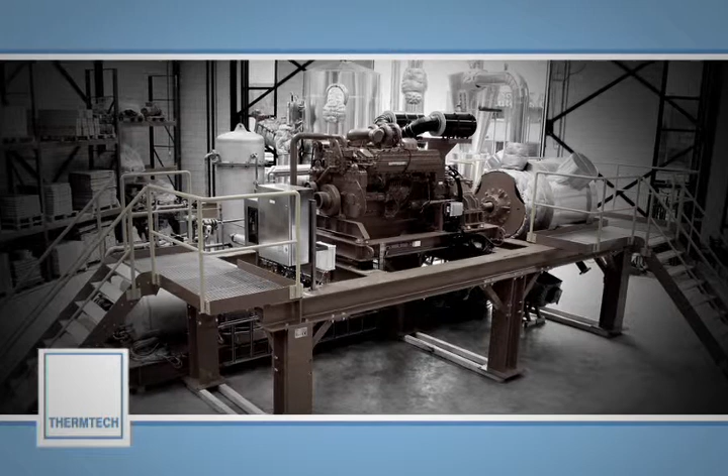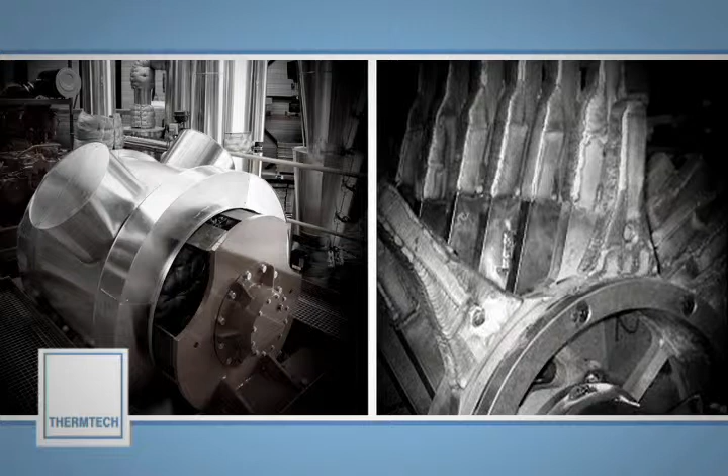The Norwegian company Thermtech is the owner and supplier of the thermomechanical cuttings cleaner technology, or in short, TCC, a patented and advanced thermal desorption technology able to treat various kinds of oily sludge. The company's head office is found in Paradis, located halfway between Bergen City and Bergen International Airport, with easy access from most large cities in Europe.

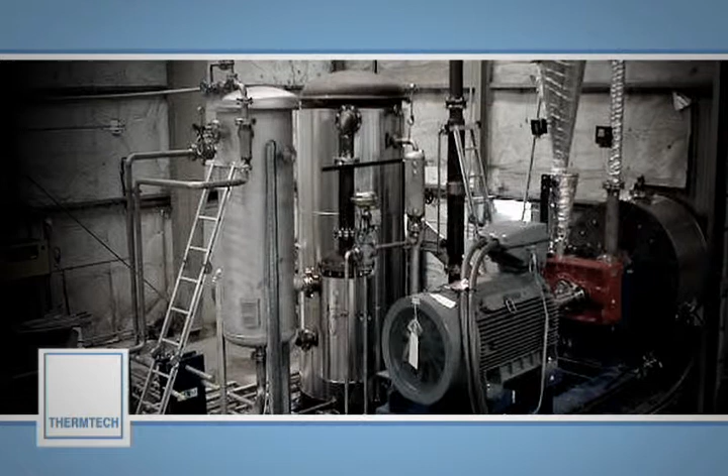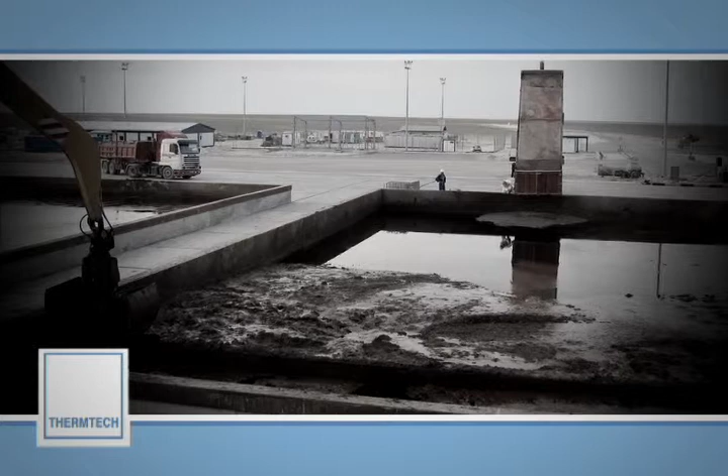The TCC is a very gentle method for separation of oily drilling waste into useful products, securing the reuse of the highly valuable base oil used in oil-based drilling mud, normally referred to as OBM. For that reason, a TCC operation is also commercially beneficial compared to other technologies or methodologies.

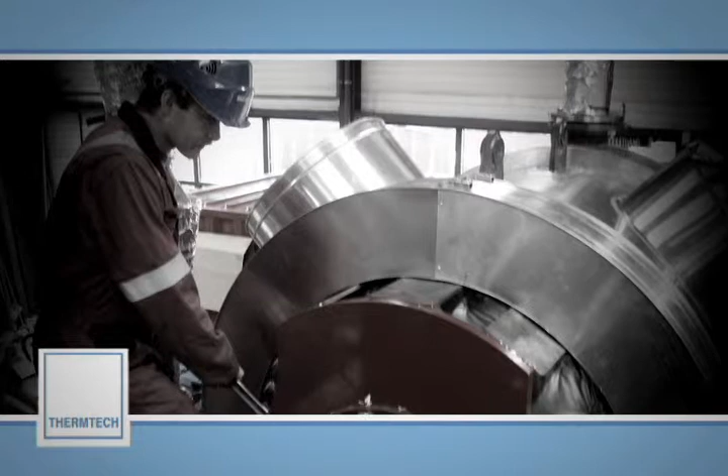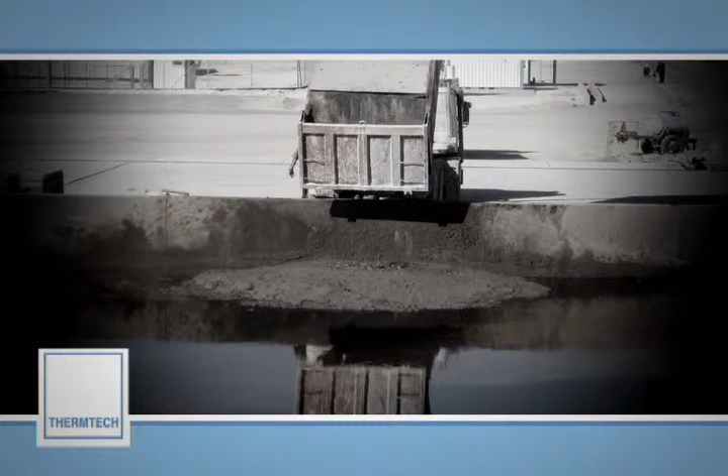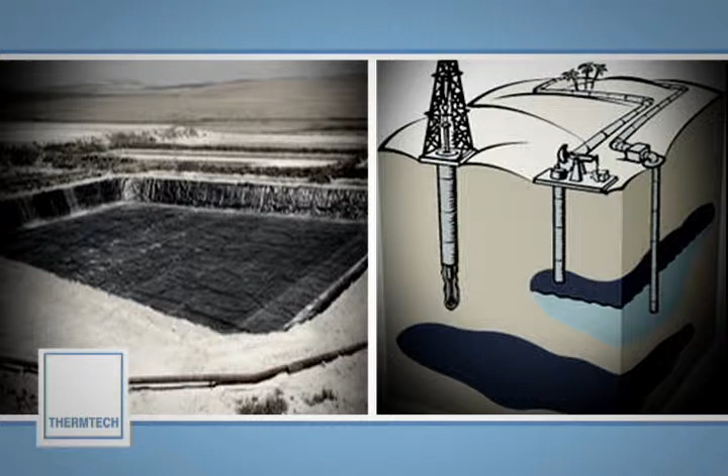In most jurisdictions, there are restrictions on how to deal with waste from drilling operations. Typically, there are limitations on discharging the waste to sea. The tendency is that these restrictions are further tightened as the environmental concern increases. There are various treatment options for this waste, like injecting it into a subsea well, controlled landfill, incineration, and bioremediation.

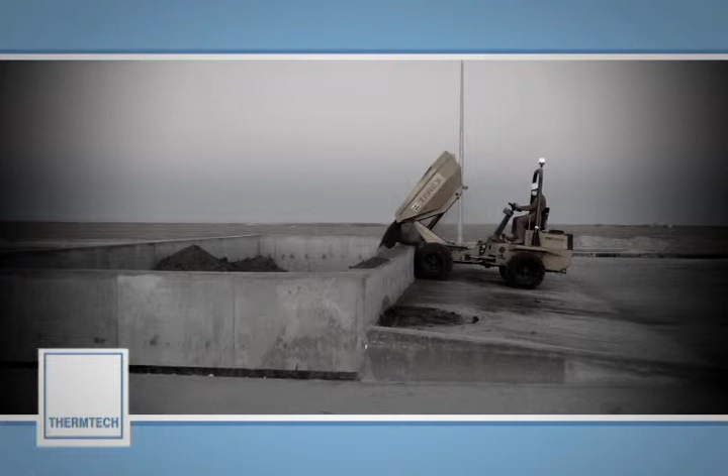With the increased focus both on pollution and on efficient use of natural resources, the global trends move towards separation of the components in the waste for useful purposes. The TCC fits well into this picture. The recovered oil can be used as a component in new OBM, and the recovered solids can be used for various construction purposes.

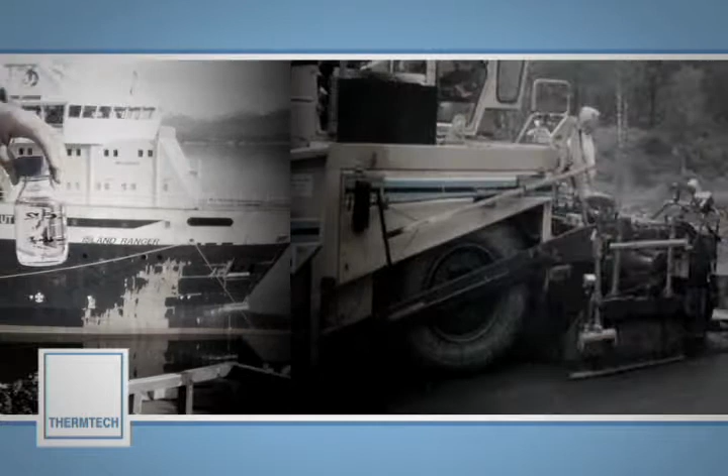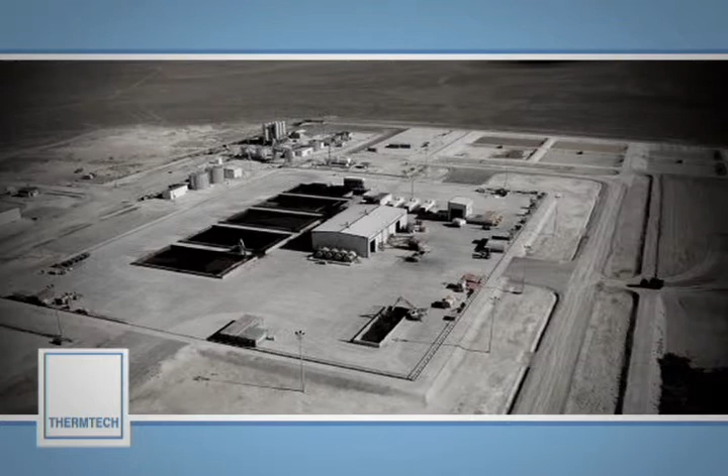TCC units are in operation in Norway, the UK, the Netherlands, Nigeria, Egypt, and Kazakhstan. New units will be installed in Russia, Turkmenistan, and Germany.

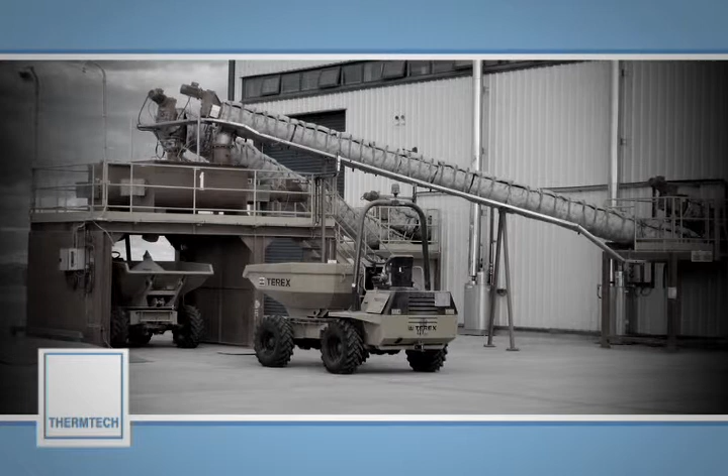By the end of 2008, at least 23 TCC units will be available for handling approximately 600,000 tons of drill cuttings in Europe, Asia, and Africa each year, contributing substantially to a cleaner environment and a more sustainable society.

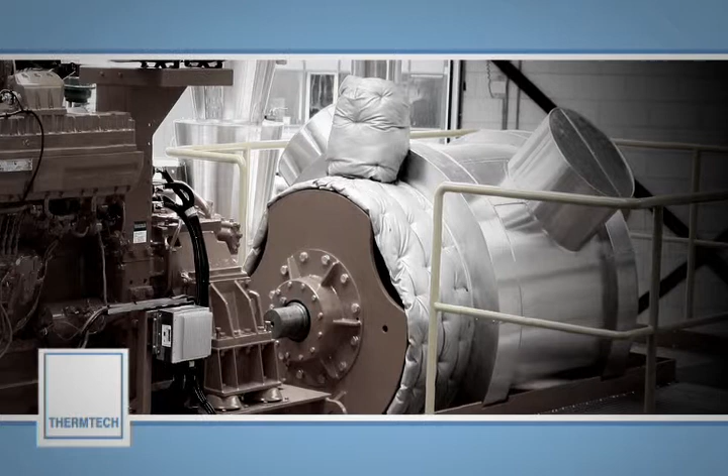In a lot of situations, TCC treatment can also prove to be the cheapest due to the high quality and value of the recovered oil.

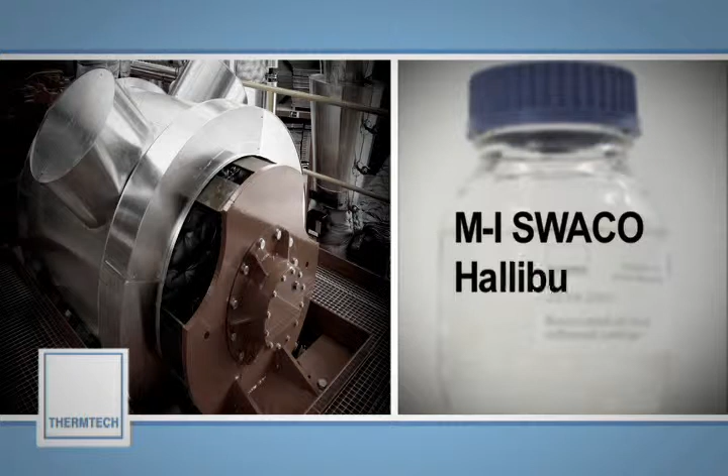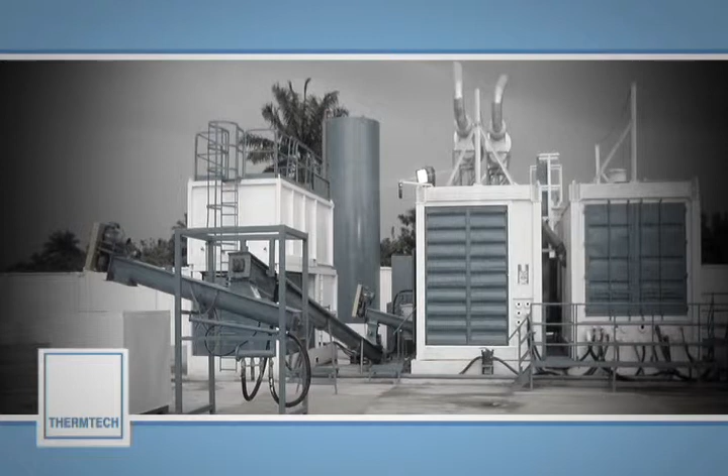Among Thermtech's customers, you will find companies like M-I SWACO, Halliburton, SCOMI Oil Tools, and Total Waste Management Alliance, referred to as TWMA. TWMA is currently Thermtech's largest customer, with operations in Scotland, Norway, Egypt, and Nigeria.

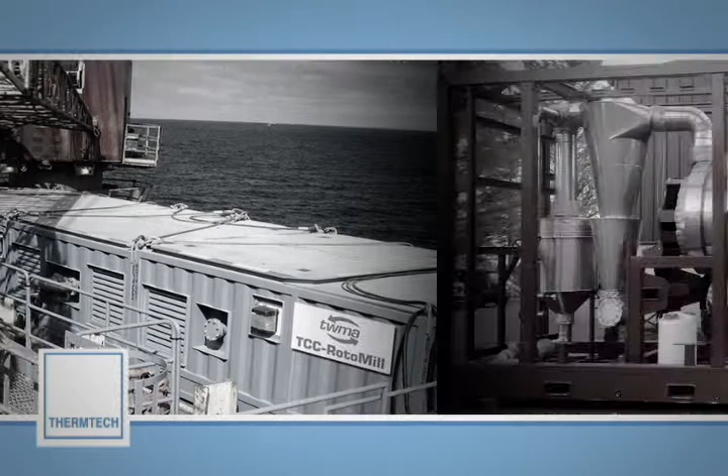TWMA is offering TCC treatment offshore under the brand name TCC Rotomill. Offshore TCC treatment will soon be offered by other Thermtech customers.

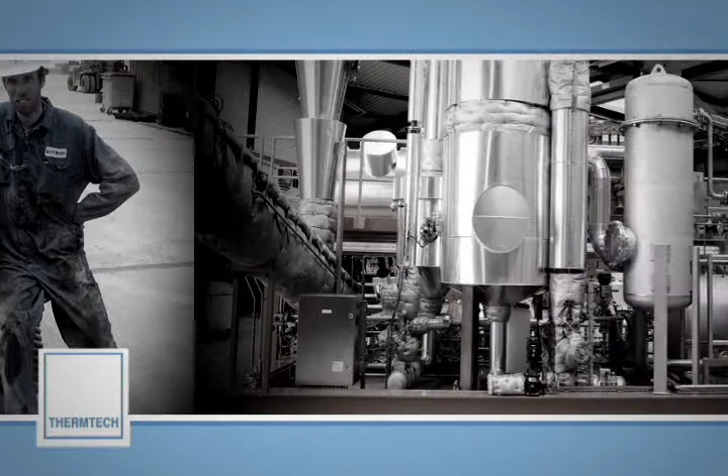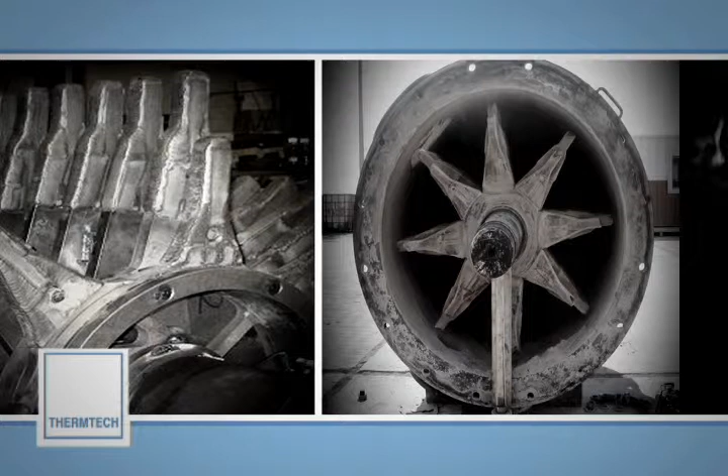Thermtech's vision to set the global standard for treatment of oily drilling waste is about to come true, thanks to the uniqueness of the TCC technology. The TCC is heating the waste differently than other thermal technologies, and this fact leads to a smaller footprint, easier mobility, a safer operation, and a higher quality of the output streams, most importantly the oil.

Let us now show you how it all works. The purpose of a TCC unit is to convert hazardous oily waste into useful products.

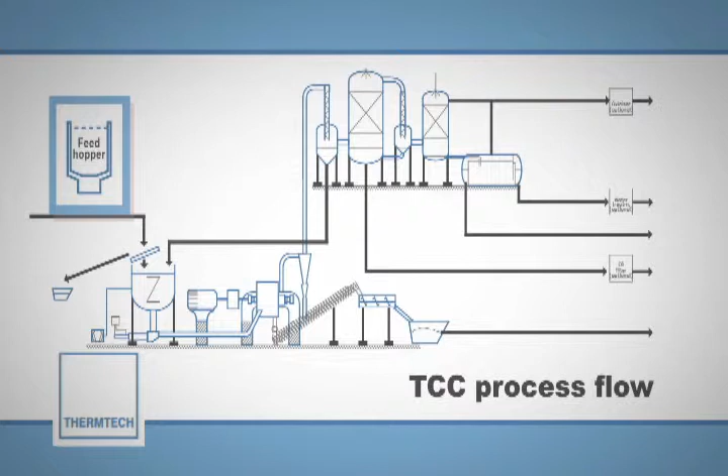The process consists of some main process steps: a feeding system, a heating process, often referred to as the mill or hammer mill, equipment for further cleansing of oil vapors from the mill, and condensing systems for oil and water.

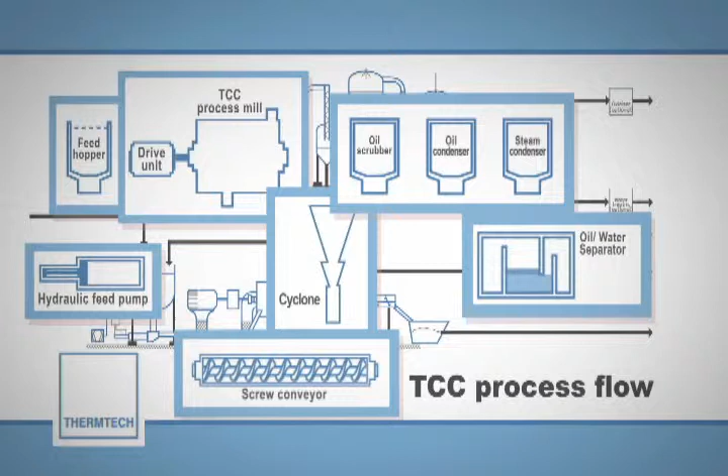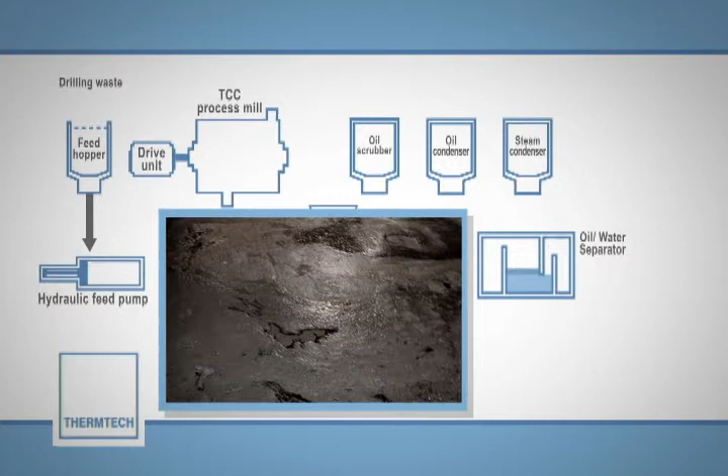All functions in the process are controlled by an advanced PLS system, and the manpower needs are low compared to other methods. A typical drilling waste will contain 70% mineral solids, 15% water, and 15% oil, percentage by weight.

This rather sticky mass is loaded into a feed hopper. Below the hopper, a double piston pump transports the waste into the next process step efficiently.

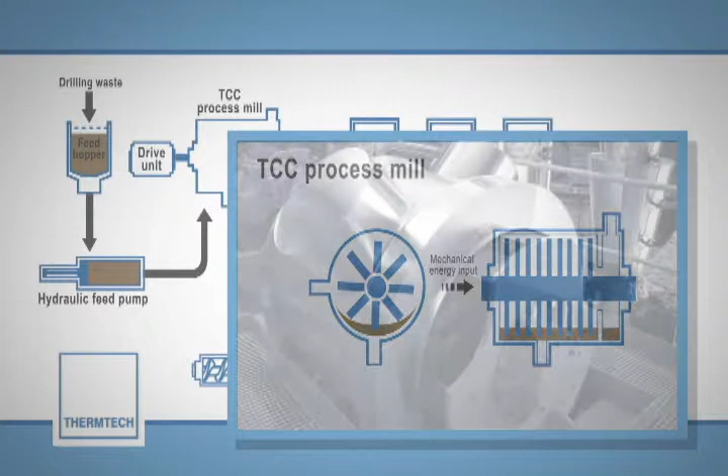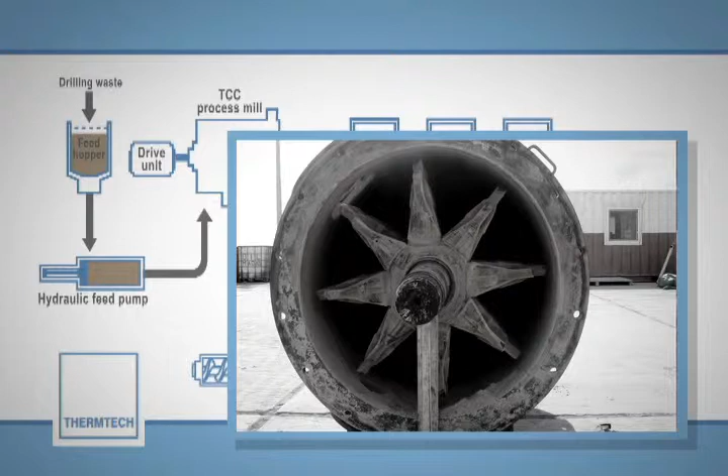The key component in a TCC is the process mill. In the TCC, kinetic energy is transformed to heat through friction created in the waste itself. This is the main difference between a TCC and other thermal technologies based on indirect heating. The core benefits of the TCC are all related to this difference.

A drive unit, typically with an effect of 700 kilowatt diesel or electric, sets a series of shaft-mounted hammer arms in motion inside a barrel-shaped vessel. Before processing starts, there are only dried solids in the vessel.

The motor will make the shaft with the hammers rotate. The solid particles will then be forced towards the inner wall of the stator, where the kinetic energy from the rotating arms will be transformed to heat by friction.

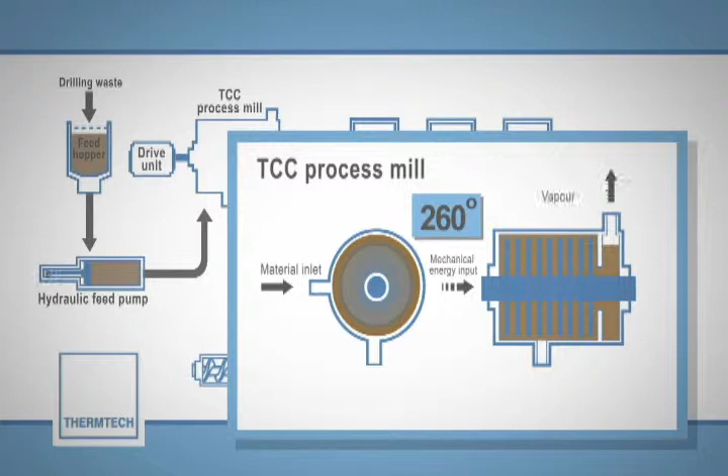When the unit has reached a preset temperature, waste is automatically fed into the reaction chamber. The waste is heated by the already heated dried solids. The solids in the waste will add up to the already present solids, and the oil and water will be heated and evaporated instantly. The solids are discharged from the chamber through an automatically controlled discharge valve designed by ThermTech,

securing both an efficient discharge without leakage of oil going out or oxygen coming in. The hot solids are then normally transported through a transport screw, cooling the solids to an acceptable temperature. The solids are then re-wetted to avoid dust from the storage tank.

Alternatively, the solids can be stored dry. The choice between the options depends on what is later to happen with the solids. A small amount of solids will be carried by the vapors out of the process mill. For that reason, the vapor stream will pass through a cyclone where most of the solids are taken out.

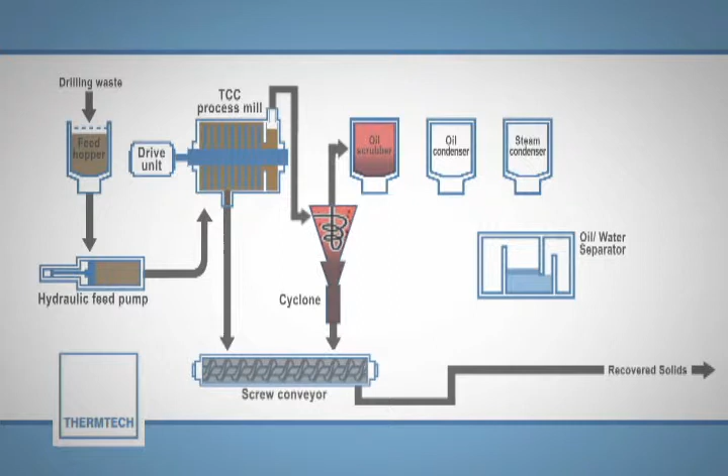To secure maximum quality of the oil, the vapors will also pass through an oil scrubber, where the remainder of solid particles are separated from the vapor stream. The next step is a condenser for the oil, where the oil vapors are brought back to high-quality liquid oil.

Afterwards, the water is condensed to liquids. A small percentage of the oil, that is some of the lighter fractions, will not be condensed in the oil condenser and is taken out from the water in a traditional oil-water separator.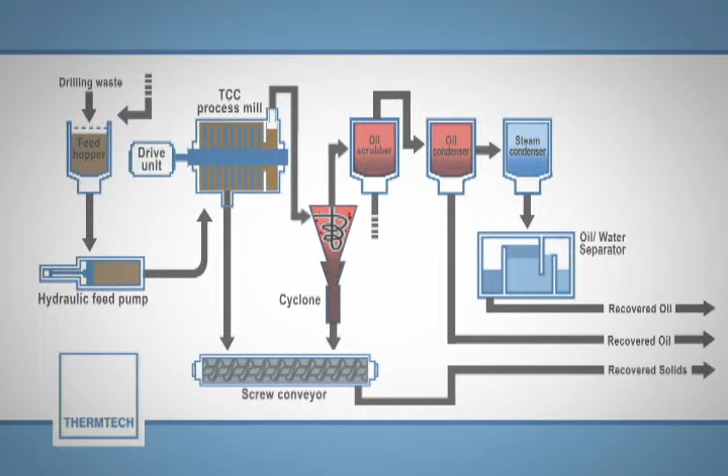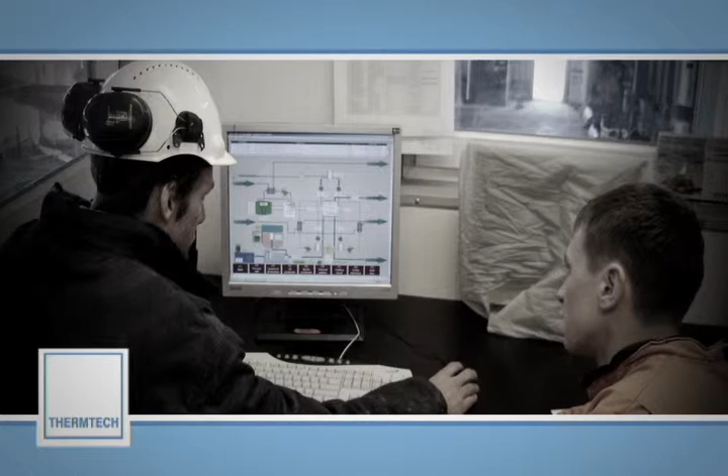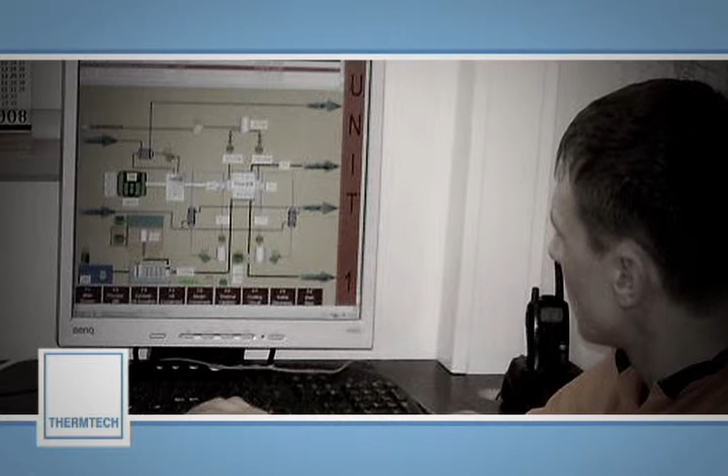Although the process is simple in principle, there are a large number of elements in the process that need to be properly measured and controlled, like temperatures, load, and pressure. The control system secures everything works as it is supposed to, and if it does not, the fault is either corrected or the equipment is stopped automatically in a safe and sound manner.

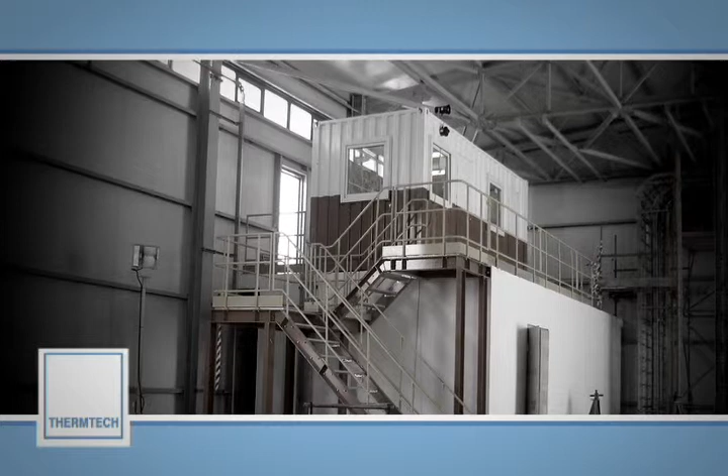The control system will normally be installed in a separate control room, but warnings and alarms will be given when the system requires human attention. This means that there is normally no need for permanent staffing of the control room. The control system can also be monitored, operated, and maintained from distance through Internet. The control systems will include a rather extensive report function, enabling easy tracing of historical data like uptime and performance.

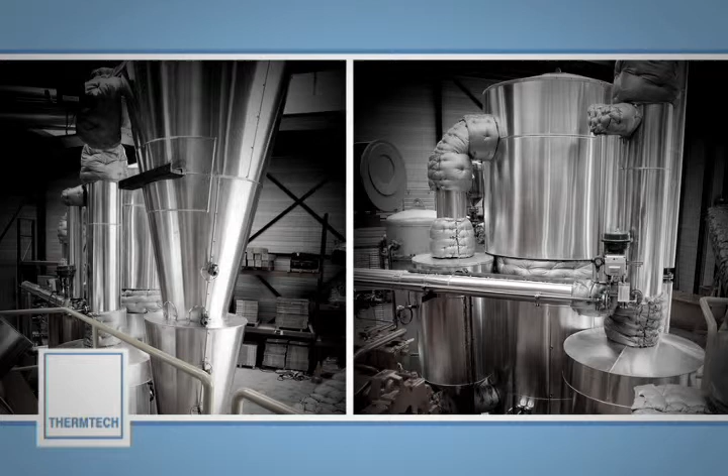Most of the benefits with a TCC are related to the way the waste is heated. The footprint is small because it is in fact the surface of the many billion small solid particles that transfers heat to the liquids. The total surface inside the process mill is similar to the total surface of the enormous heated surfaces of an indirect dryer.

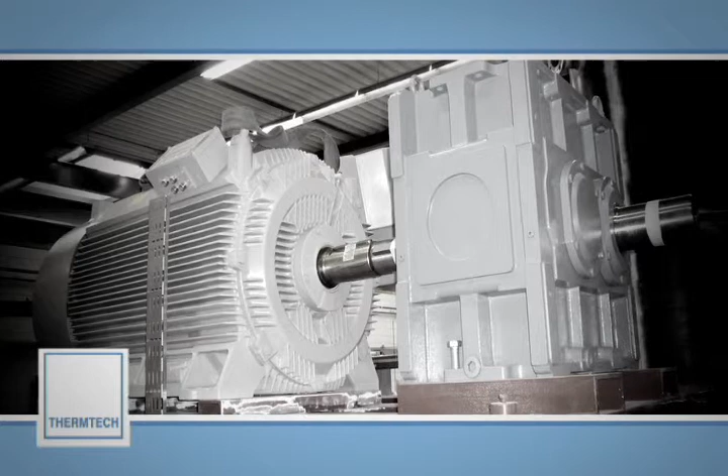The startup is quicker. When you switch on a motor or engine of 700 kilowatts, it soon becomes rather hot inside a 1 meter by 1 meter chamber, with particles constantly colliding. The process loses less energy to the surroundings because there are no large heated surfaces.

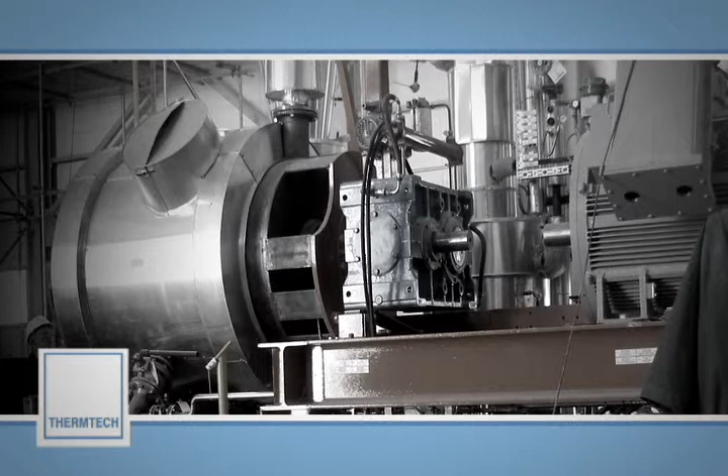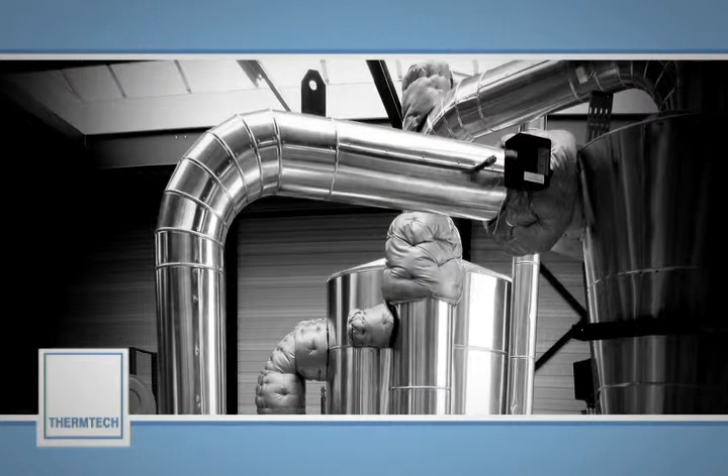It is safer because there are no oxygen sources worth mentioning. It is simply much easier to protect by insulation and simple routines. The strongest commercial argument for choosing the TCC technology relates to the quality of the recovered oil.

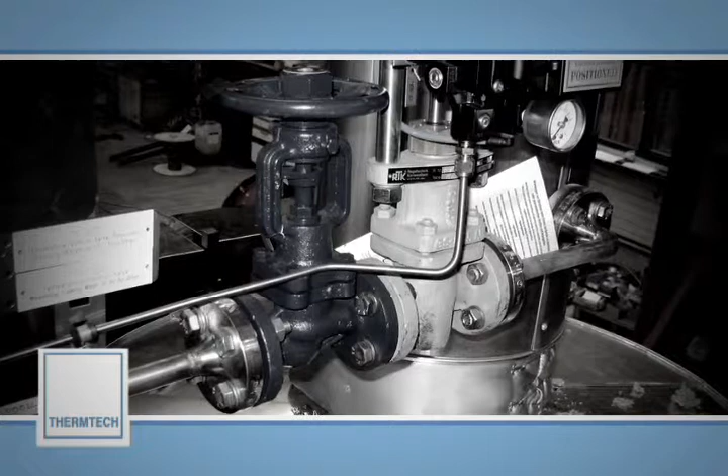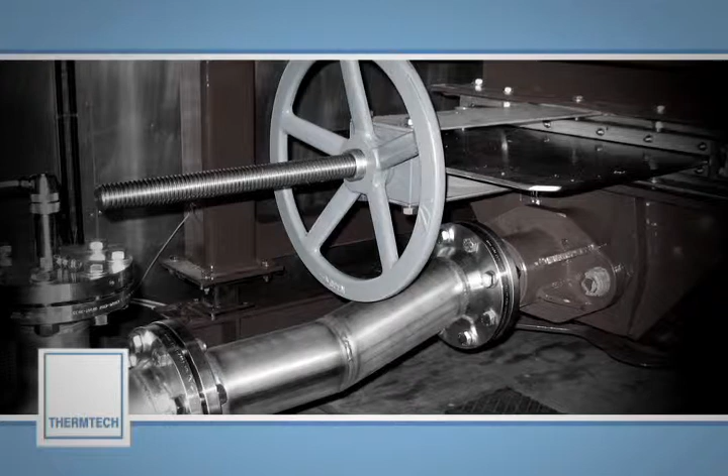That is proven to be higher in the TCC than in any of the competing technologies, and that is logical. In the TCC, the retention time for the oil under high temperature is maximum a few seconds before it leaves the chamber as vapors. In the indirect heaters, the waste, including the oil, is heated slowly, like water in a kettle.

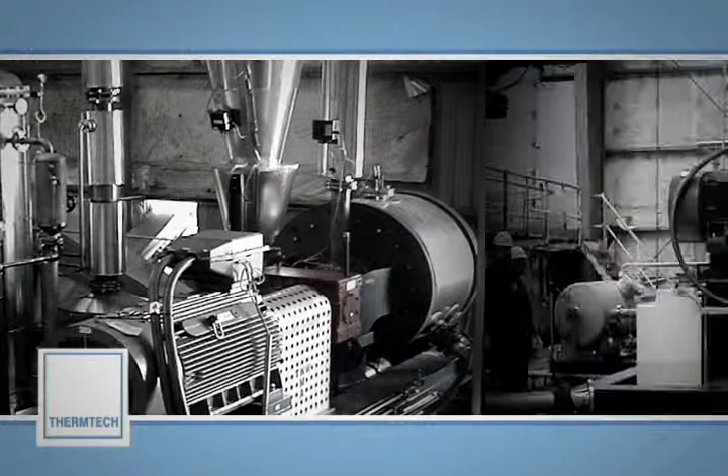In addition, the temperature of the heating medium in an indirect dryer needs to be higher than the evaporation temperature of the oil, meaning that the oil is also influenced by a higher maximum temperature. In the TCC, the hottest spot in the process is actually the waste itself.